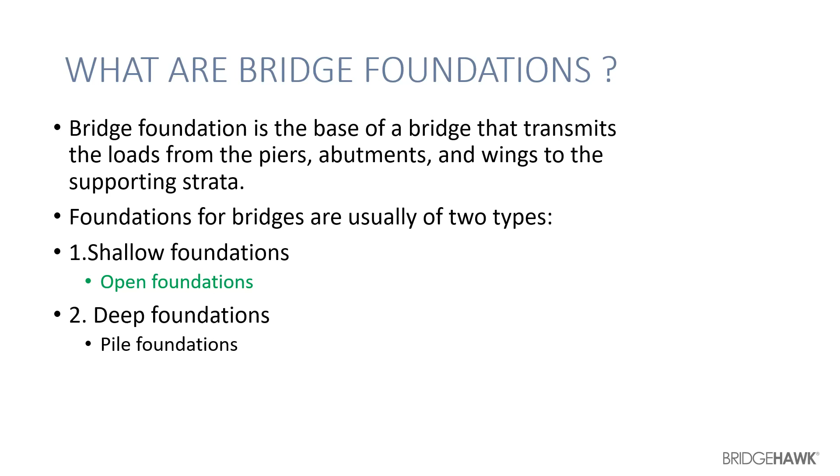In the last webinar, I had shown you this sketch, and there would be some references to the last webinar that I had conducted. Basically, the bridge is parcellated into three different parts. The top one, as you can see in the sketch, is the superstructure. The one in between is the substructure, and the foundation is that portion of the viaduct which lies below the ground. The substructure comprises the pier cap, seismic arrestor, the pedestals, the bearings, and any other component involved.

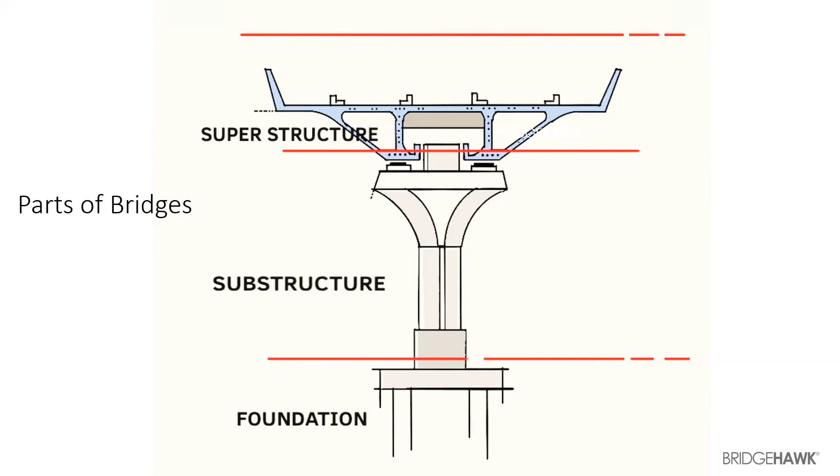The superstructure is typically your entire girder. Over here in the sketch, that is a multi-cell box girder. So that about sums up what the superstructure actually is. The footing, the shallow foundation, is a part of the foundation, of the three parts we have made of a bridge. So moving on, shallow foundation.

So what is a shallow foundation? It is also known as a spread footing or an isolated footing or a single column footing. It is considered as such when the width of the entire foundation is greater than its total depth, implying that the depth is not exceeding its width. Only in that case will we call it a shallow foundation. Around the world, this is the most economical and most common type of foundation used for bridges. Even for very heavy station piers, you'll find that we have been using shallow foundations.

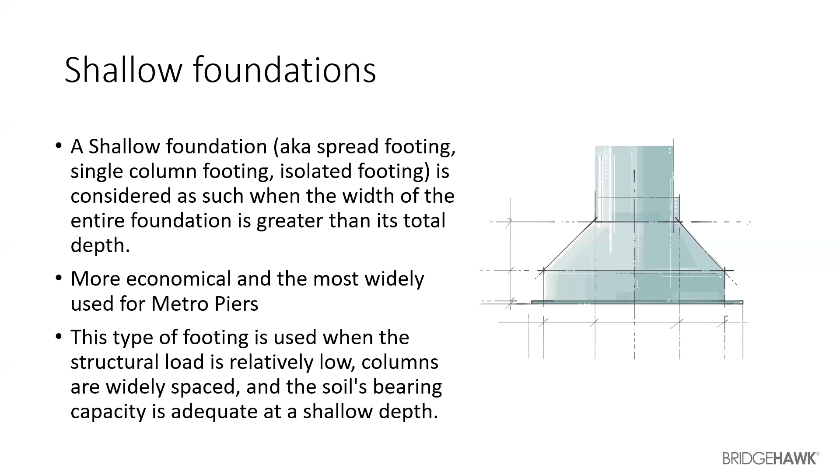Even for Pune Metro, many of the station piers are designed on shallow foundations. This type of footing is used when the structural load is relatively low, columns are widely spaced, and soil bearing capacity is adequate at the shallow depth.

Because we'll be delving into the different types and categories of loads that we're going to deal with, it is important to know the different components that comprise an overall viaduct of a bridge. This is just a simple way of indicating what is what. Starting from the bottom, I've indicated a pile foundation. So there's a pile, a pile cap, crash barriers, piers, pier cap, bearing, the seismic arrestor, box girder, rail pedestals, and crash parapet.

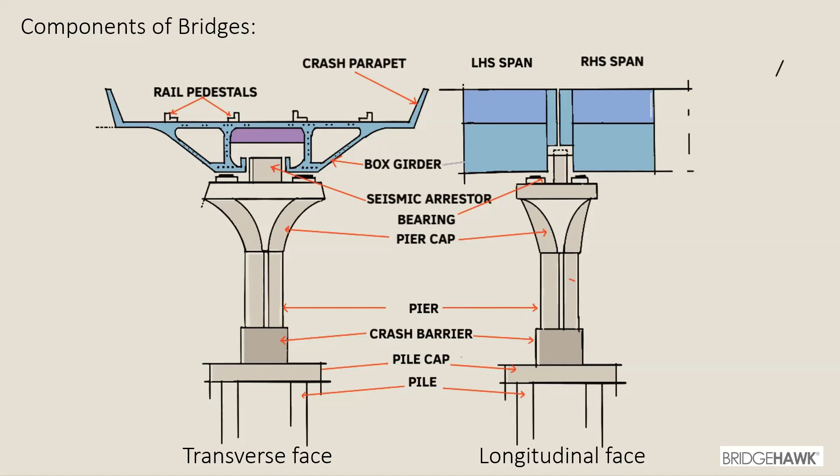In the longitudinal face, I've indicated that there's a right-hand side span and a left-hand side span. We'll be talking more about what it is exactly. Most of you have already at least seen a metro viaduct, so it would be very easy for you to relate to something like this. Over here, what you see is 3 spans. All of them are simply supported spans on box girders. This is a model I made for one of my videos on Bridgehawk, the YouTube channel.

For the sake of this webinar, we'll be delving upon pier P177. This is a span arrangement. By span arrangement, I mean that at P177 there is a span to the left of it and a span to the right of it. And there are 2 tracks: on one track there's a train, and another track is just beside it. When there's a span on either side, we have to know the different details of the span. The details are shown here: the carriageway details.

Before beginning my analysis of what sort of design I need for the foundation, it is imperative to know the different types of loads my foundation is going to experience, along with the lever arm that different forces are multiplied with to create a certain moment. This table will be required when you start the design process. When gathering the design data, the first thing you need is the carriageway detail. The first row is span, indicating the LHS span and the RHS span, in meters.

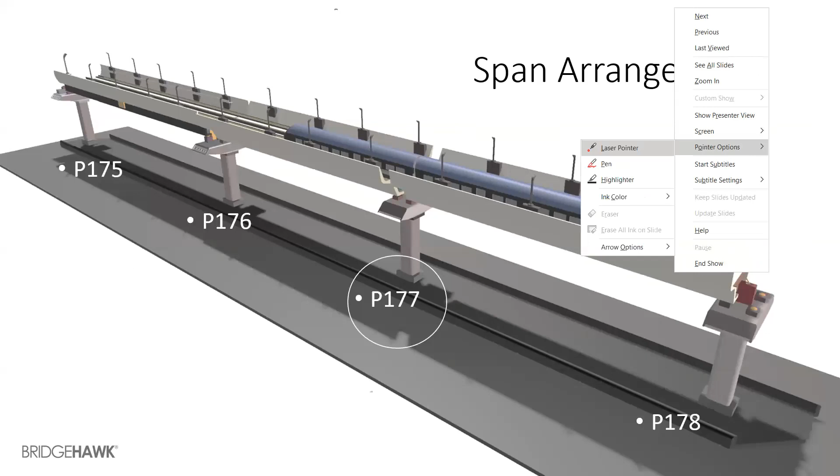On the left-hand side of pier P177, my span is 35 meters, and on the right-hand side the span is 30 meters. So we'll have a certain unbalanced longitudinal moment. The dead loads from the left-hand side span will be more than the loads from the right-hand side span, so there would be a residual longitudinal moment. I'll tell you what a longitudinal moment is in a short while. So my first understanding is that there is an unequal span.

The second row indicates the type of girder used in the span. In this case, we've got a post-tensioned box girder on either side of pier 177. You might have a different girder on either side, for example a concrete girder on the left and a steel girder on the right. It completely depends on the designer's preference for how he wants to encounter this challenge. As long as he can prove it to be safe, he can design it.

The width of the box girder is 9 meters. The depth of the box at the centroid is 2.5, meaning the height from the top of the girder to the centroid is 2.5 meters. The center to center distance of the tracks is 4.5 meters. The cross slope is 0.025%. Why do we need a cross slope? Cross slope is provided in the section of the girder to drain off any water that comes onto the girder.

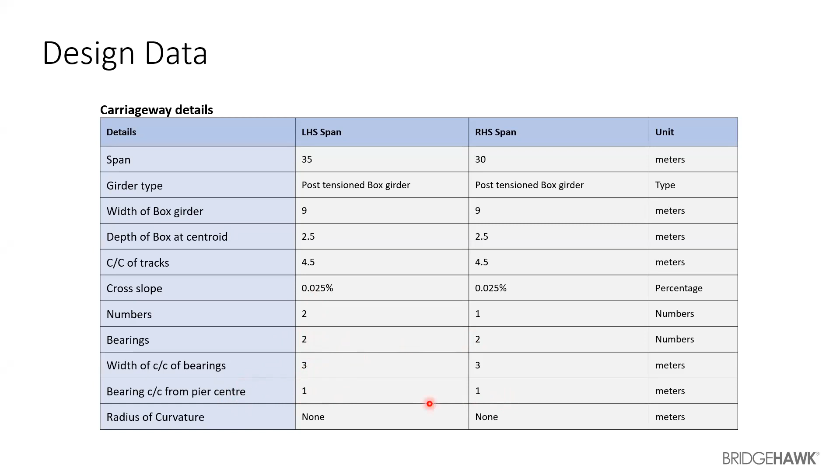And over here, I've mentioned radius of curvature is none. So what this is implying is that these are straight spans. There is no curvature included. We don't have any radius of curvature, because having a radius of curvature exponentiates our challenges.

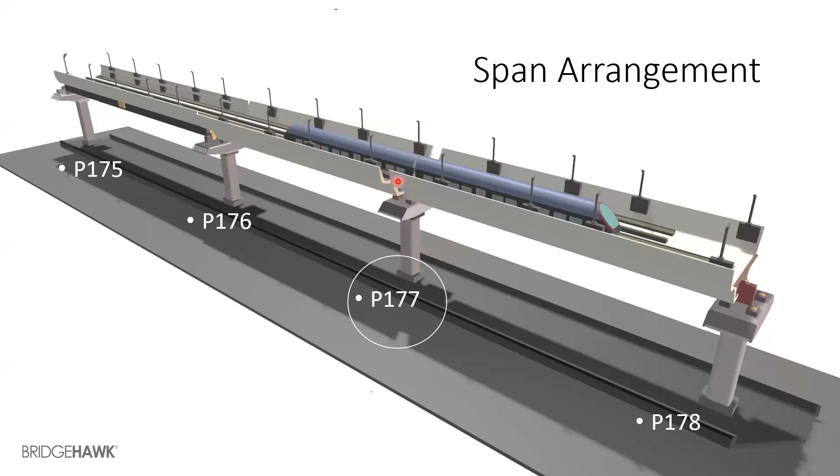If you just had a curvature, the level of centrifugal force that you'll have will be huge, and certain other forces would exponentially increase. So for the sake of the discussion on this webinar, I've taken a straight span on either side. Okay, so moving on.

All right. So for the design data, you need to know the location details. What is the pier number? What is the chainage? Chainage is basically the distance of the pier from an imaginary straight line. The pier height, what is the height of this pier? All the different design levels, which I'll show you in the later slides.

The pier cap details, what sort of pier cap is it? Is it a flat pier cap? Is it a hammerhead? Is it a post-tensioned pier cap? Or is it an RCC pier cap? RTL to floor level, I'll show you what this is. This is rail top level to the floor level. So what is the extent of the heights that we're dealing with?

And the seismic coefficient. For example, this bridge can be in an earthquake active zone, or it can be in a zone where the seismic coefficient is not very deterministic. Second, we just read about the carriageway details, the material details. There has to be a material table, which I'll be showing you. There has to be a span arrangement.

What is the number of tracks? What is the distance? What is the type of footing? The span on either side. The sectional data. What is the type of section for the pier? What section is it for the pier cap? What is the section for the box girder or the I girder or whatever girder that you have?

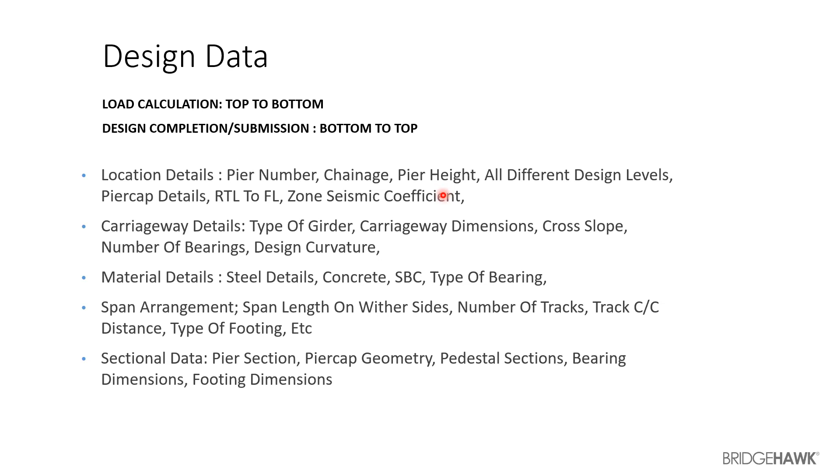All right. So basically, many of these things are specified in the DBR that is submitted to us by the client. In the case of metro projects, which are very prestigious projects, the DBR has to be provided by the government, the client. So the client is basically specifying what he's expecting of the design. In this design basis report, he has to specify every single thing that he has anticipated in the process of having his design project actuated.

So before starting any project, a well-defined design basis or criterion, in addition to a well-defined scope of work, has to be set forth by the client. A DBR document is the criteria, or the rationale, which has the principles, the assumptions, and the constraints used for the detailed engineering and the final design product. It is essentially a set of conditions, requirements, the needs of the project, the performance, maybe timelines also, and legal and codal requirements, obligations, etc.

So everything that needs to be known before you start the project or before you anticipate the end of the project has to be mentioned in the DBR. As the name implies, it is a design basis report. So it has to include all the different factors which the structural engineer might require in order to complete his design safely and sufficiently, in order to satisfy the client. Whatever data he requires has to be mentioned in the design basis report.